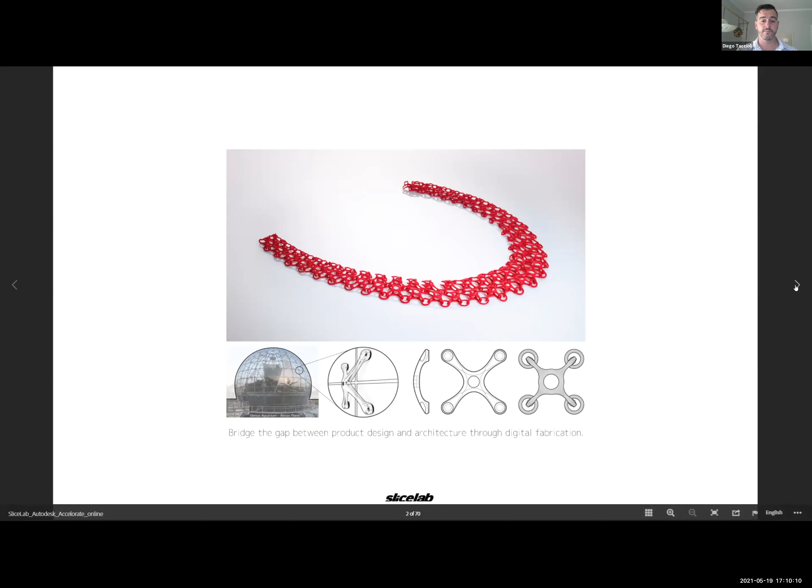So Slicelab basically bridges the gap between product design and architecture through digital fabrication, like I mentioned. While we work a lot in architecture, we have now gotten into a lot more zoomed in design, so product design, some really small pieces versus large pieces, and furniture design.

Generally, the types of fabrication we're familiar with are the three that most people understand: subtractive manufacturing, which is like a CNC mill; additive manufacturing, which is 3D printing and all 7 forms of that; and formative manufacturing, which is like injection molding and traditional styles of making products.

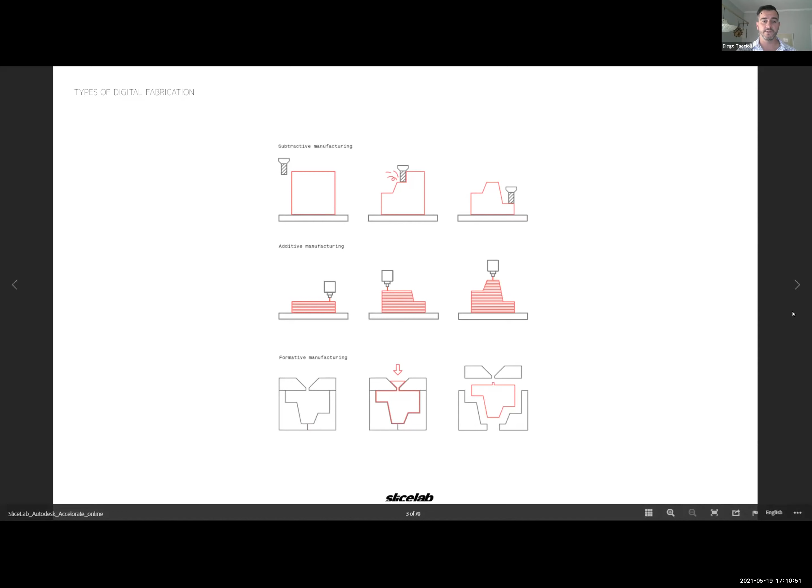So I just want to cover DfAM, which is basically design for additive manufacturing, and how generative design and topological optimization are starting to be quite a force within this realm. Generative design has been seen mostly solid for the most part, and it's starting to become pretty useful for manufacturing in all different careers and applications.

And now there's a lot more seen with lattice design and both, where generative design is something where you can do a lot of customizing, assembly consolidation, and lightweighting, while topological optimization is basically having a set geometry, like this bracket, and reducing the weight. With generative design, you can set certain parts to be fixed, and everything else basically grows from it.

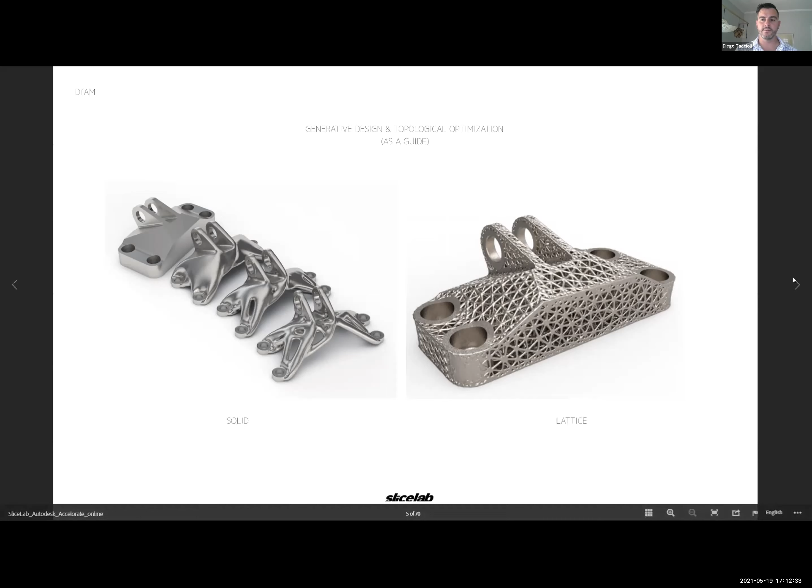The Roadrunner is a lightweight bird with a very interesting skin pattern on its feet, which allows it to be light, quick and unnoticed. So we started to develop our own voxel to understand how we can use compression and rebound. A voxel is basically a 3-dimensional pixel, or volumetric pixel. By programming our own voxel into what would be a shoe or a midsole, we map a foot imprint with a certain amount of forces that were generated through a set of colors.

So basically, you can kind of relate that. Let's say the red is the hardest point, which I can't remember the exact newtons of which we put into the software. But this goes into our parametric design, and the amount of torque, beam thickness, scale, overall height, shrinking, and rebound are basically calculated into this using this image, as well as some other factors.

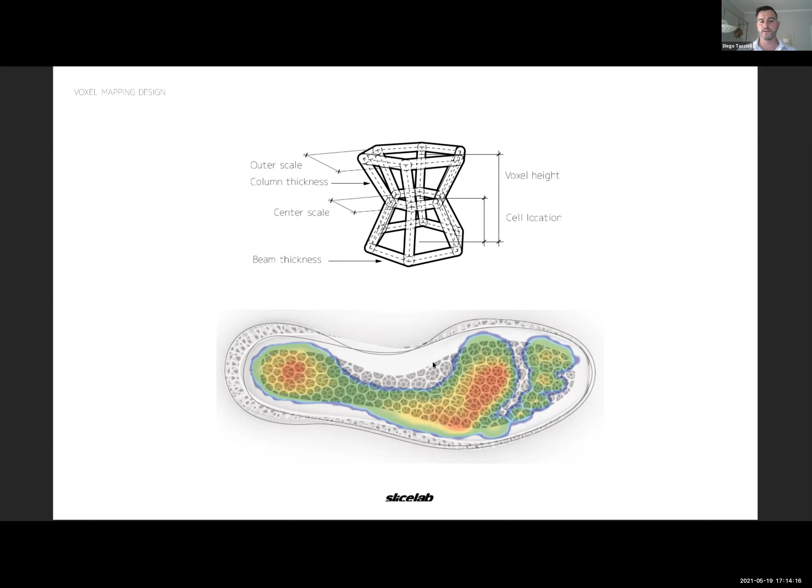And here's some final images of what we got, kind of showing the lugs on the out pattern here and kind of the midsole opening up here for the opening. So Diego, that shows the scale of those voxels, right? Yeah, exactly. So each one of these would be a voxel. Almost each one of these. It's actually like a square a little bit further past it.

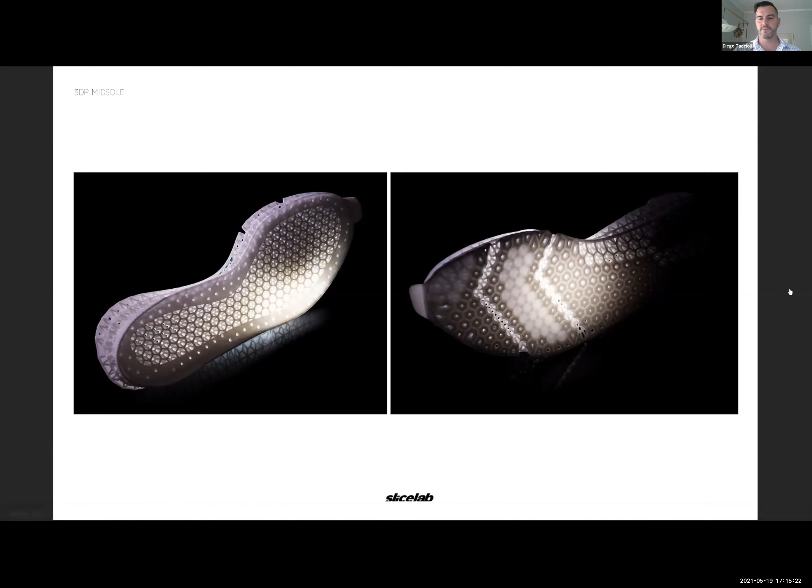And how did you come up with the name of the voxel? Is it like a volumetric pixel or something? Oh no, I didn't come up with that. It's kind of like a term used in this industry a little bit more. I just say it's a three-dimensional pixel, so people sometimes are not sure what I mean.

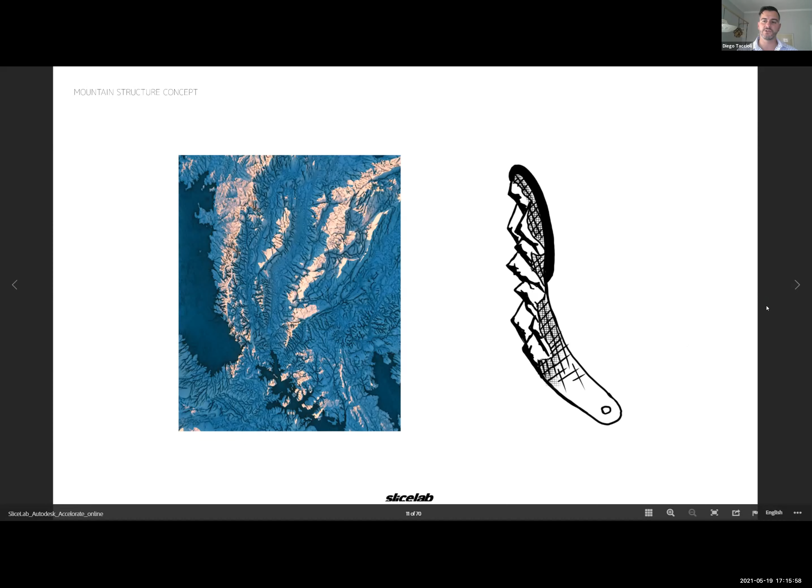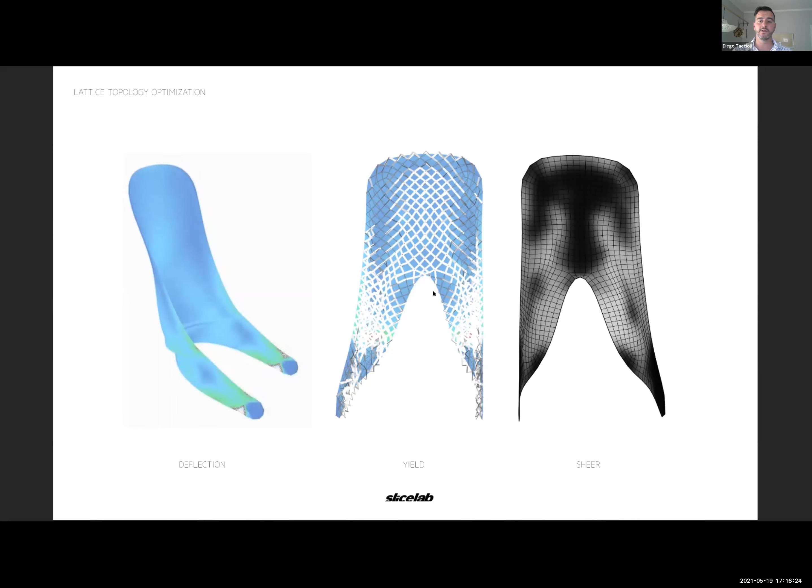And using this topology optimization for the lattice, we were able to calculate the deflection, the yield, and the shear, and basically create thicknesses where they're needed, the orientations where they're needed, and the amount of material which we can take out. So in this particular one, we figured out that we could take out this bottom part here and create this geometry, which we later 3D printed with a new high impact material that hasn't quite been released yet, but also has good thermal properties. And it's made by Loctite. And again, our partners at Origin were working with us on getting these printed.

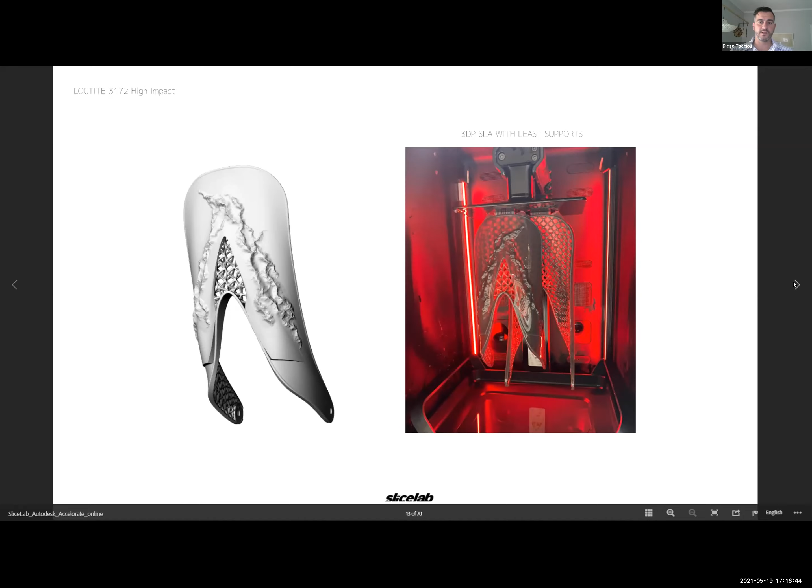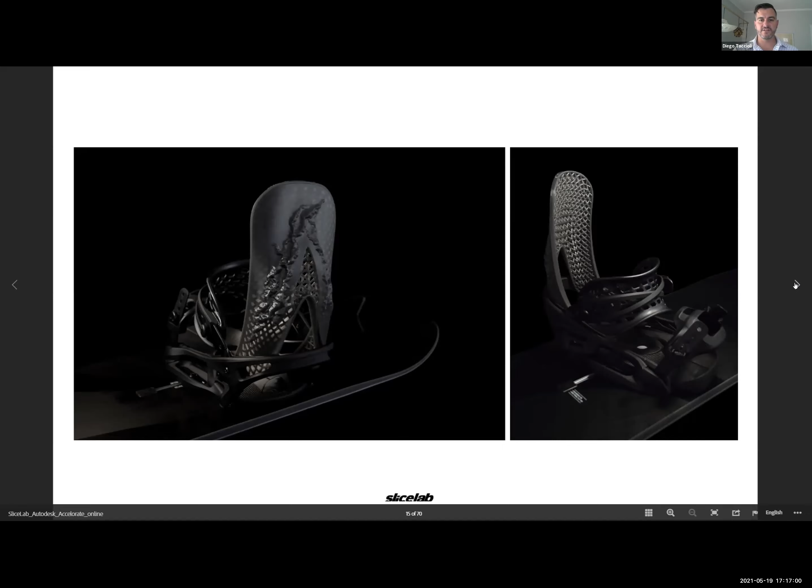And this is a real photo now. I actually went to test ride this last week, just kind of great. It seemed to hold up pretty well. So yeah, that's kind of a taste of what we were working with in terms of lattice and topology optimization. But more importantly, we're trying to get a little bit more research done on concrete complex forms.

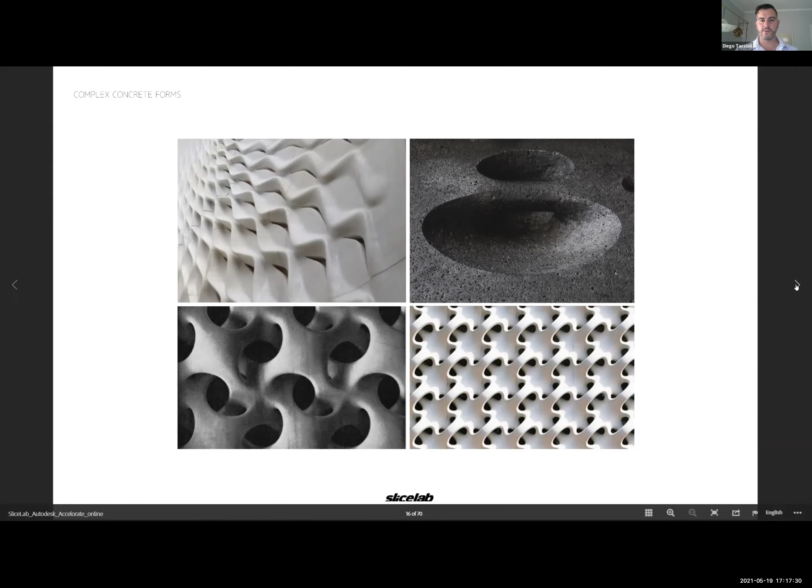So here's some precedent studies we've seen before that we were really interested by. Things like this, where there's a hole in between, or even all this stuff that's modular and then later connected. Zaha's wall texture here. This kind of stuff isn't normally seen in architecture without paying a lot of money, or even possible to do. So these days, there's just a lot more going on with it. So we took our own version of how to create some concrete forms.

Now, this is an existing developing concrete print process, which is basically a large 3D printer that extrudes concrete through a nozzle. While this is very impressive for sure, there is just so much more to be explored, because unfortunately with FDM, which is basically a type of printing process which just means that it's being extruded, you can only establish so many types of forms with concrete or clay or any type of mixture without using formwork, because it's just really heavy and gravity takes its part, and it's not solidified.

Plus, it just doesn't come out rock hard. It doesn't come out rigid. Of course, it needs to be mixed, it needs to dry, it needs to cure, etc.

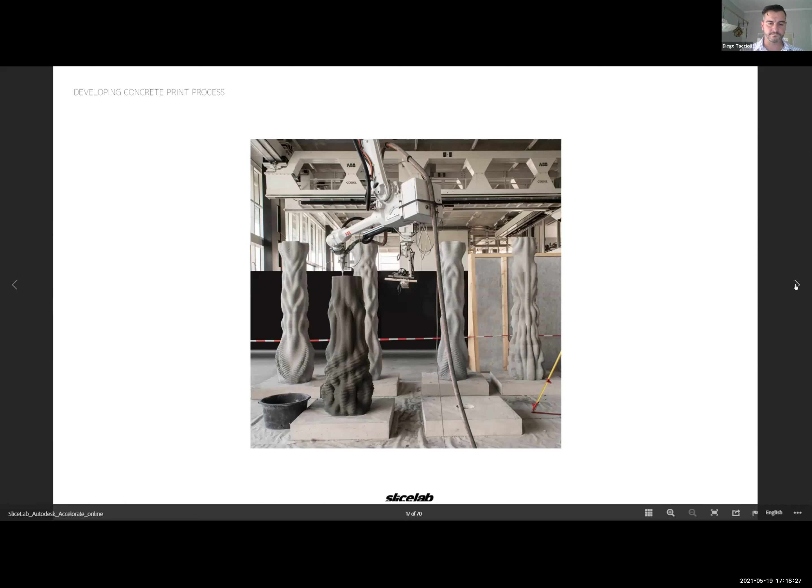So what we started with is creating a few different forms that we wanted to pour concrete into using 3D prints. So we started with a simple shape like this that was able to have 4 flat sides, which create the openings for the cavity. And then we bolted together 4 pieces of PLA, thermal enhanced PLA plastic.

Also, we added some additives like alkaline resistant fiberglass, super plasticizer to make it more flowable and to have less water to make it stronger, and then chopped basalt fibers as well. So we started playing around with the mix of all these.

And one last thing is we coated the insides of all the molds because we wanted to see what the difference of applications would be. So sandpaper, which is the most common you see with 3D printing, Z-Poxy, which is an epoxy pigment, and then there's an acetone vapor bath and a 3D print specific epoxy, which is called XTC-3D.

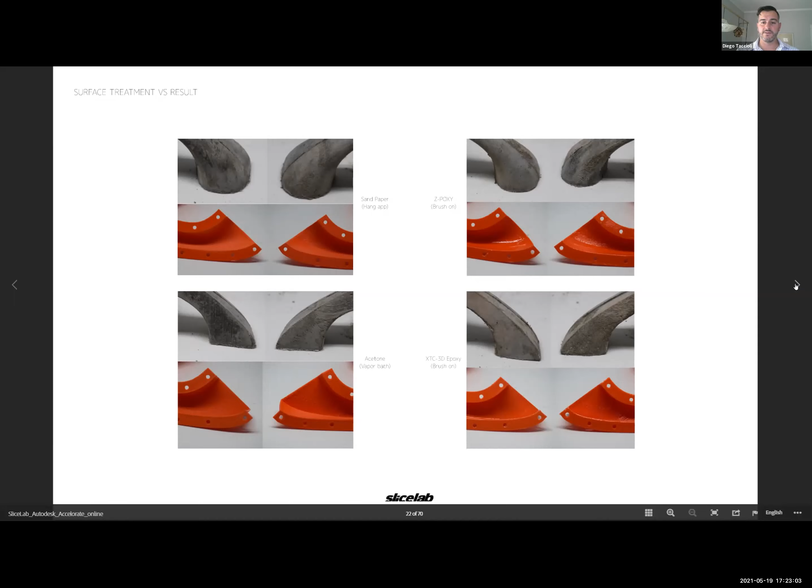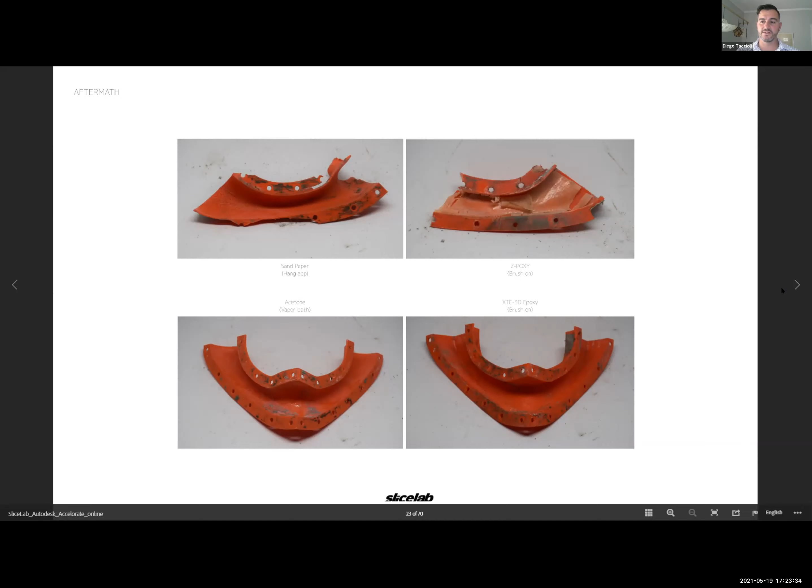And you can start to see the differences after they've been poured. So the sandpaper had the most connection to the concrete and therefore broke the most, and also seemed to suffer the most in terms of being able to stay connected. The Z-Poxy had this snakeskin-like finish after it was excavated from the print, and the last two had a pretty good rating. So we went with this piece as our next point from which to keep researching.

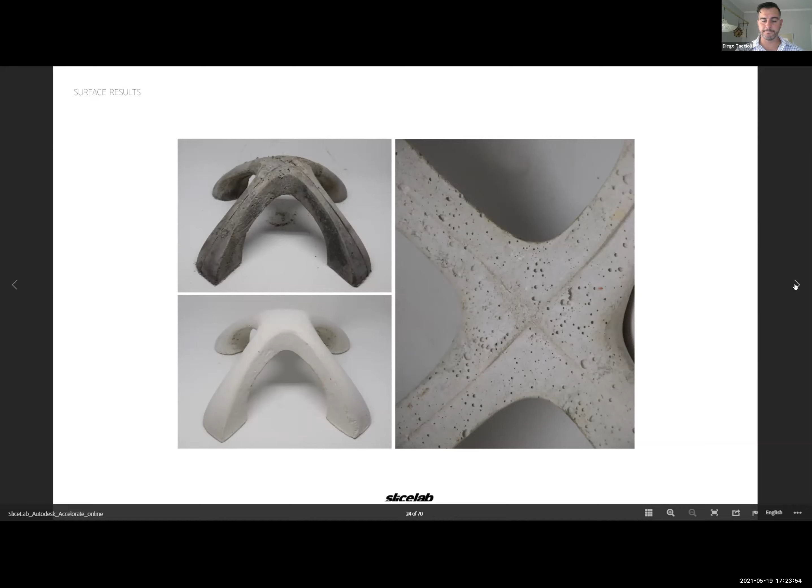And one interesting thing is we were looking at this cratering, this moon cratering that you see underneath. This is basically all the air pockets trying to get out, which weren't able to get out. So we went with this slurry, and we started to design another form. It's basically a smaller table, trying to grow up to that same size. So this thing's a lot smaller.

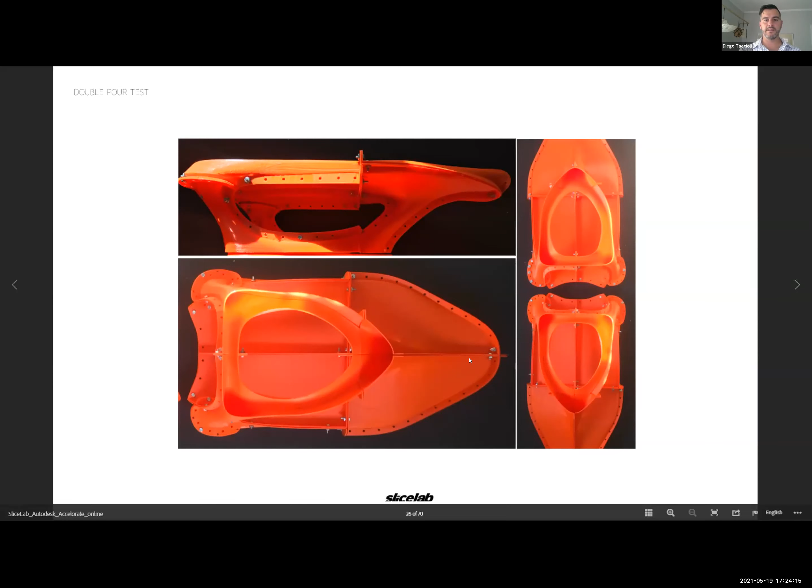It's kind of like the same size as a small ironing board. So again, we printed two sets of pieces that we were going to pour all from the top here, and they would all basically solidify underneath here, creating the top surface as a very smooth piece. And after we made an educated guess on what the two slurries should be, again, we're going with this particular one that we found to be the most valuable.

We started to see the exact amount of stress that was starting to happen on both these thin limbs and the actual 3D prints, and where they started to break because of hydrostatic pressure, because of weight, and because of off-gassing, et cetera. They really started to rupture on their own. These aren't broken by me or anything. So you can start to see the material that's coming out of it now. I just put a small iron on there to give you a reference.

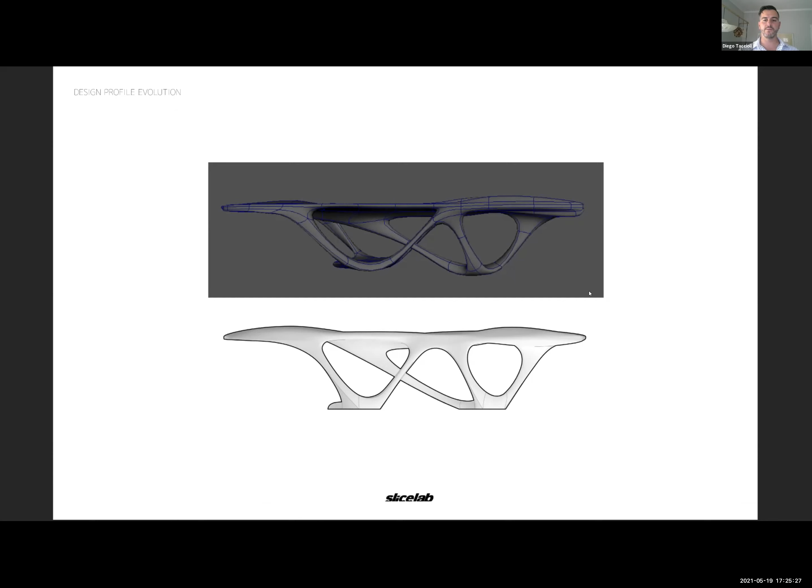So these seams started to become an issue. The texture started to become an issue, so we started to adjust accordingly. So for the final shape, we started designing through the section profile. So we want this look in terms of what the final is going to look like. We started with a Maya design that was completely sculptural and how we wanted to make it, and then we finished with something that looks a lot more like this.

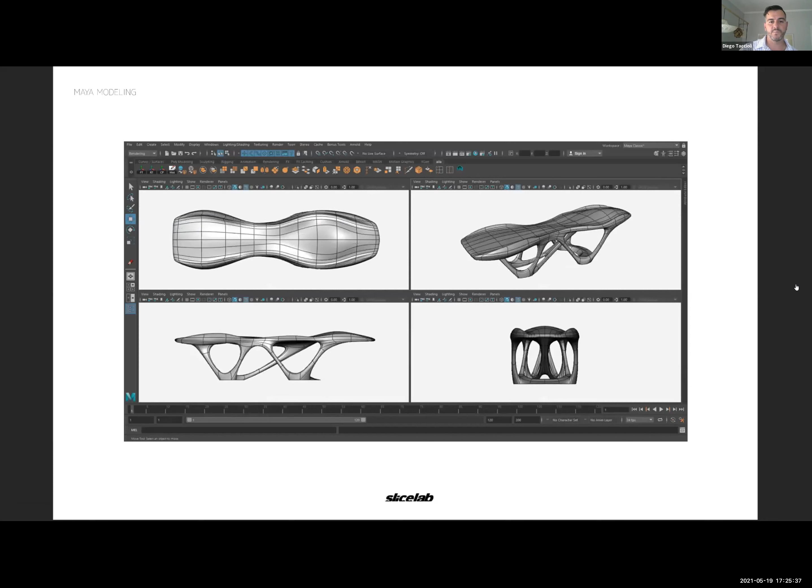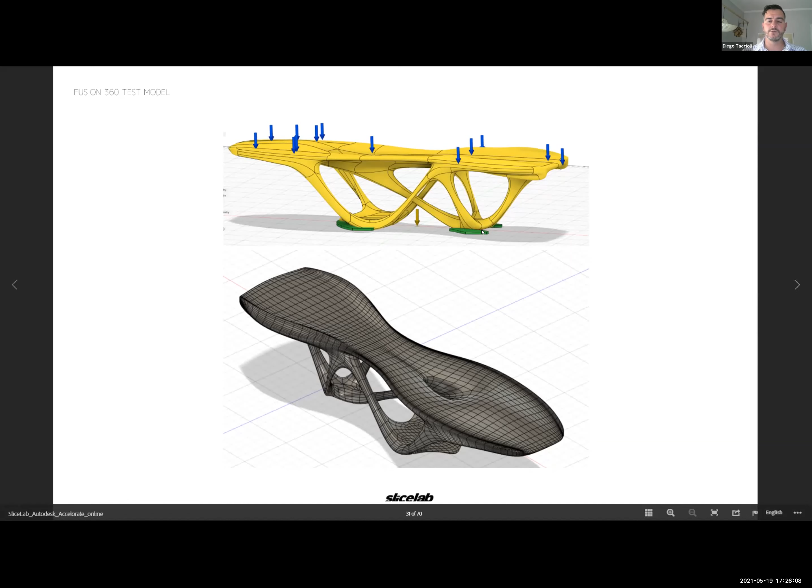And we went back and forth between Maya and Fusion using the generative process in Fusion 360. And here's just a quick time lapse of a lot of the different forms we started playing with and what we ultimately landed on. So eventually, once we were happy with the general section that you saw a second ago, we brought this into Fusion 360, and we put the adequate forces on it for the overall weight and the additional weight that we wanted to add. And we put 3 major points of connection so that our piece would basically use the generative design to ultimately land in these points versus how it is currently.

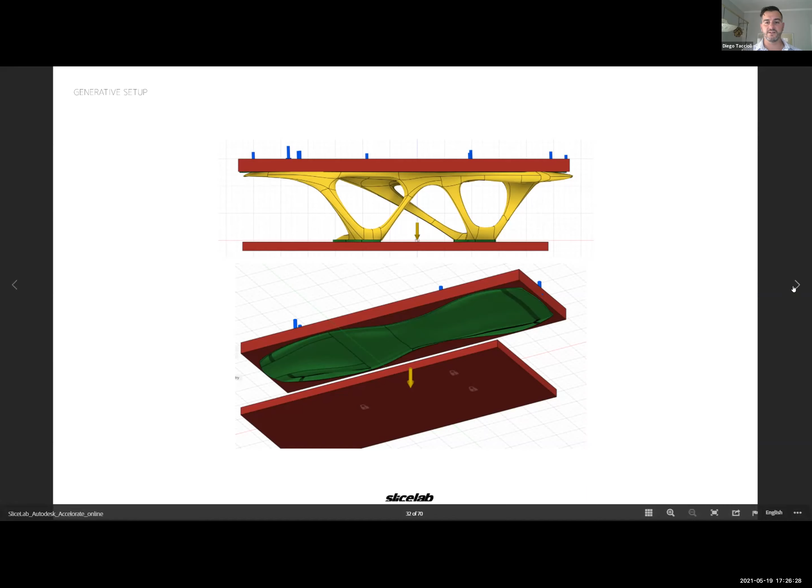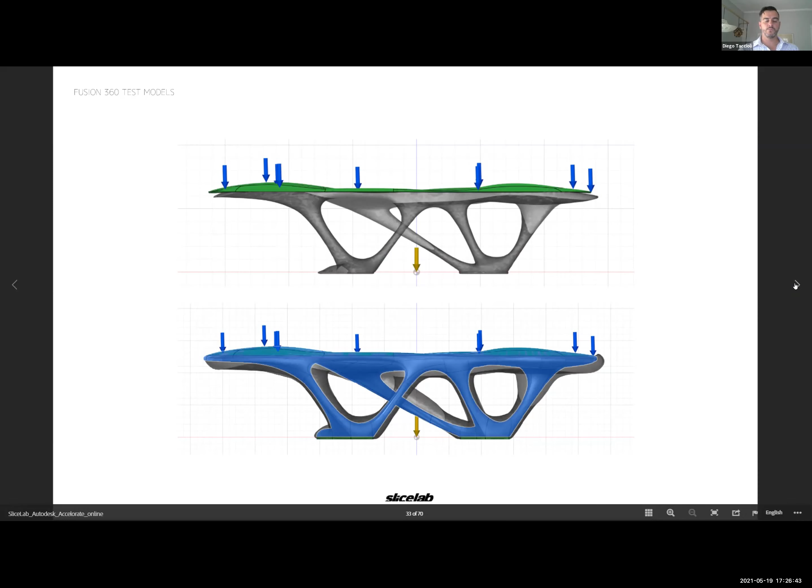And the way we set up the generative design is we designed a surface that we wanted. That's the green. The red is areas which the generative design cannot grow into. And then the yellow is the existing, or basically what we implemented. And then this shows what we got here versus what we started to implement from the previous one, and then adding a lot of the thicknesses that we had to assume at that scale, even though we had a really good feeling that we can go a lot thinner than was suggested to us.

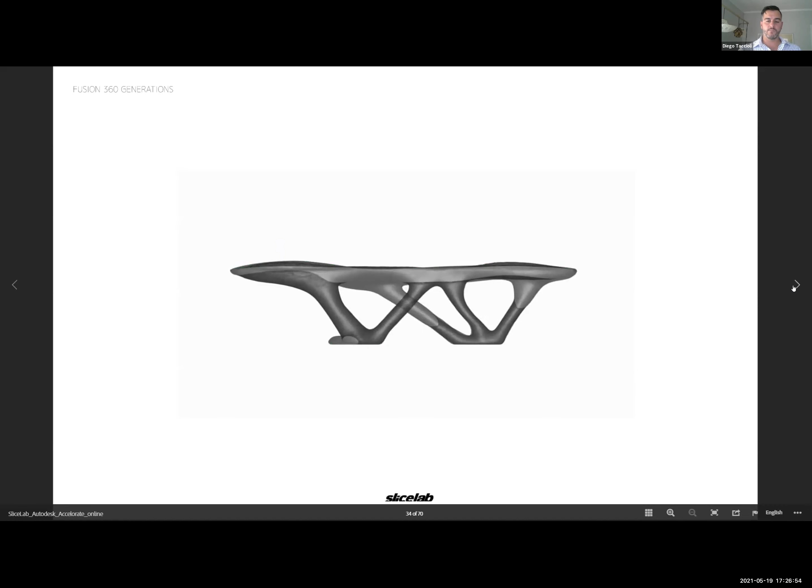So here's just a quick video of the generative design and where the forces are and how thick it started, and then how it solidifies down. Yeah, really interesting. So of course, as I look at these smaller objects, I'm questioning, how does this scale to the size of a structure? I will be getting there. It is a good question. It scales. Let me just get there because it's kind of hard to. First answer is I don't know yet, but we are looking to do that.

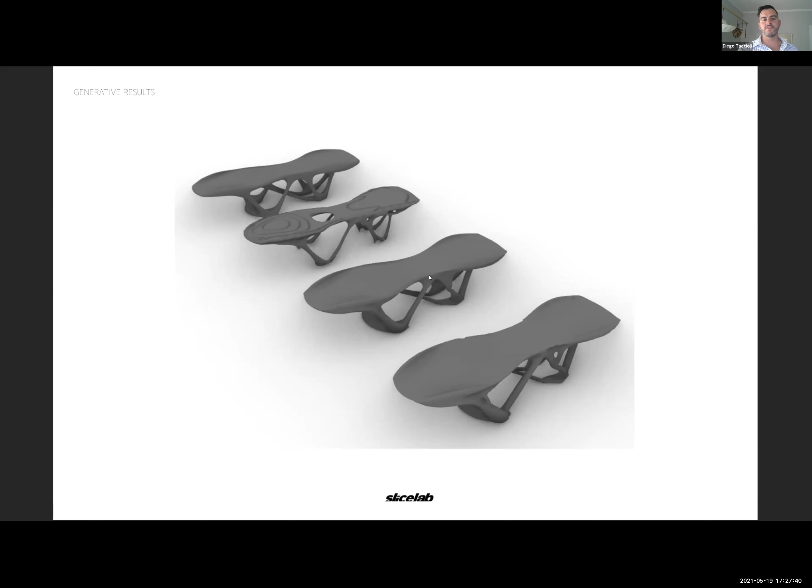So here are some of the generative results we got. This particular one here was an evolutionary solver, or basically something that was topologically optimized to reduce as much weight as possible. This we thought was a little too thin, so we ended up picking one of these and then redesigning it to create a form that we were happy with. And then we made a prototype at half scale, same exact strategy, except this one was supposed to be identical to the full scale one.

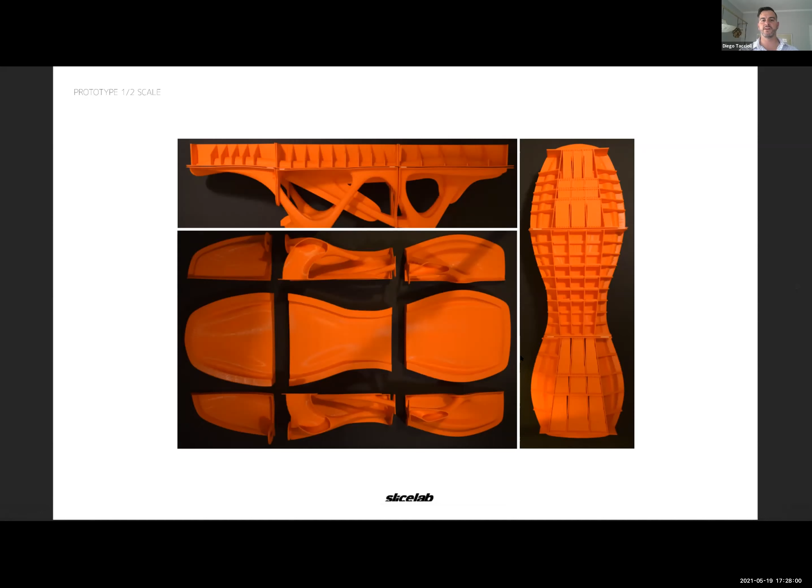So we put these ribs across the bottom so that it would sit flat when it's poured, but also to give it additional structure. We post-processed all the pieces with the exact thing we talked about before, with sanding and adding the epoxy. And then we started mixing the slurry that we designed as the best for this type of project. And we had it on a shake table. And this is what it looked like right after we poured it. And again, there's bolts all around the edges, and some additional clamps in areas that started to bust in the middle of the pour.

And we just kind of took notes from there. Like the previous one, it was not created to be demolded. So we just took a few blow torches to this to try to get it out, because we didn't really know a different way without absolutely breaking the actual piece, which is actually pretty fun, as you can see a photo of me there.

We did have some burn marks, and we lost one of the legs here. And I'm not entirely sure that's because of how thin it was necessarily. I think we kind of bumped it, but that was somewhere where we decided to bulk it up anyways in the future. These are the top and the bottom views of the molds before and after.

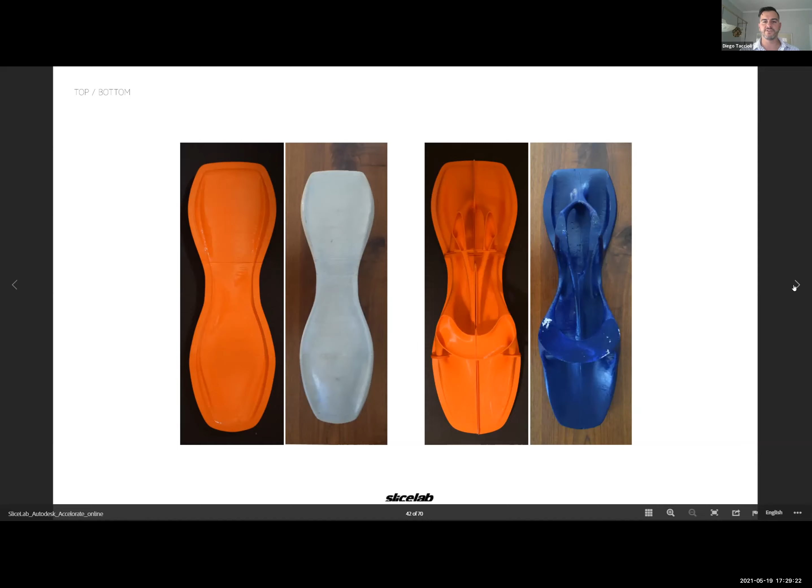We painted this blue just to kind of establish the line between the smooth and the porous, and also kind of to hide the fact that we had to glue it back on, which you can kind of see right there. And then lastly, before the final, we made a full-scale partial mock-up. So this is just like one of the legs that is part of the full scale, and we kind of analyzed the way that it flowed into the cavity with time lapse and with temperature gauge.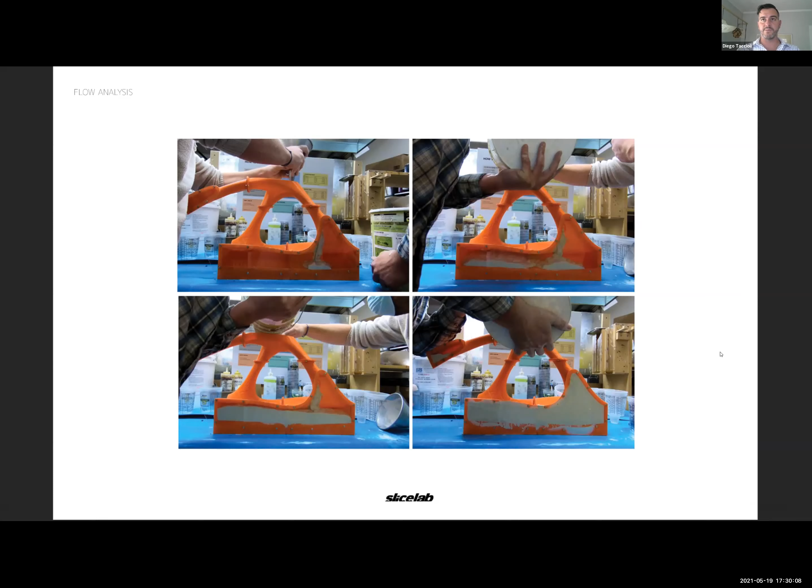We also started to implement a drilling process, because as it would off gas and heat up and the hydrostatic pressure would increase, you could feel the molds move in pressure points. So when there was a bubble that we were able to feel only after doing this a bunch of times, we were able to drill in there, alleviating that piece and allowing the concrete to kind of come out, but not enough, obviously, to leak out.

And then the glass, or the plexi, was really helpful to kind of see exactly where the flow issues happened and how they worked. Let's see here. So this is the full scale mock-up, a little bit closer. You can start to see that the bubbling here was a little bit too massive, and the texturing at that scale started to be a little bit distracting to the point where it was not ideal.

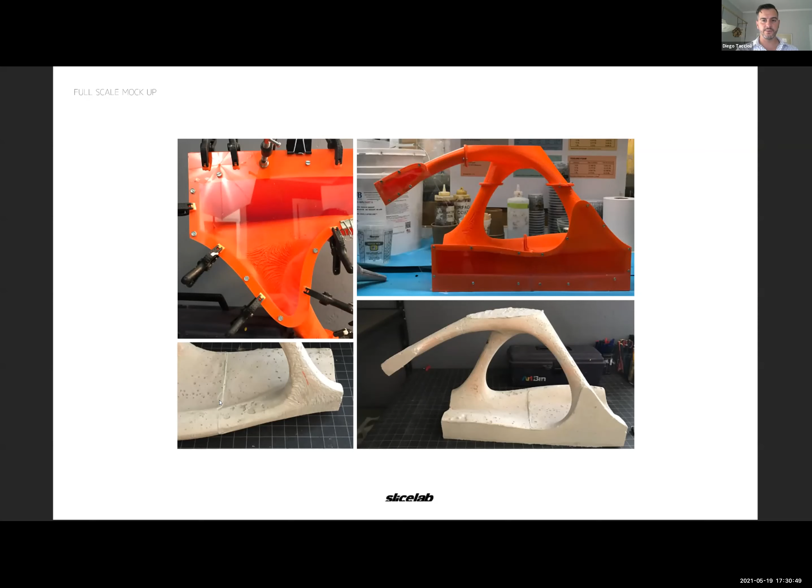Even the top piece where it was supposed to be flat was very chunky, and the separation, because of the stress, was able to really significantly move it. So again, we had to go back and reinforce the shape. So this is the final shape. We broke it apart into 23 pieces, all of which were rectilinear in form, because we did have to print it on a relatively standard printer, which was one of our main goals, not to use anything overtly fancy to create something of this complexity.

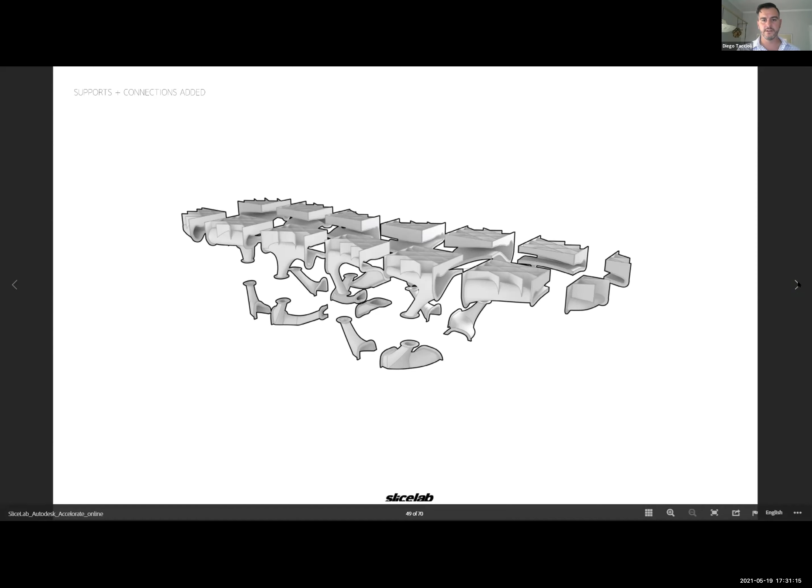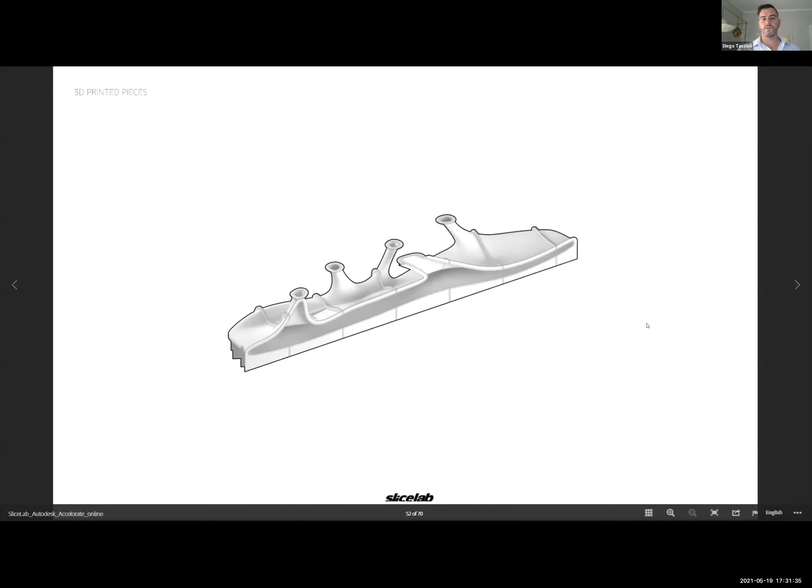And these are all the pieces in the exact orientation in which they printed, for them to have the strength that we needed in the direction that we needed, because that's also important. These are the full prints, kind of all lined up right before the assembly. This is the assembly that we made in this exact order as well, because lining up the main edge was relatively easy in comparison to lining up all the other side pieces.

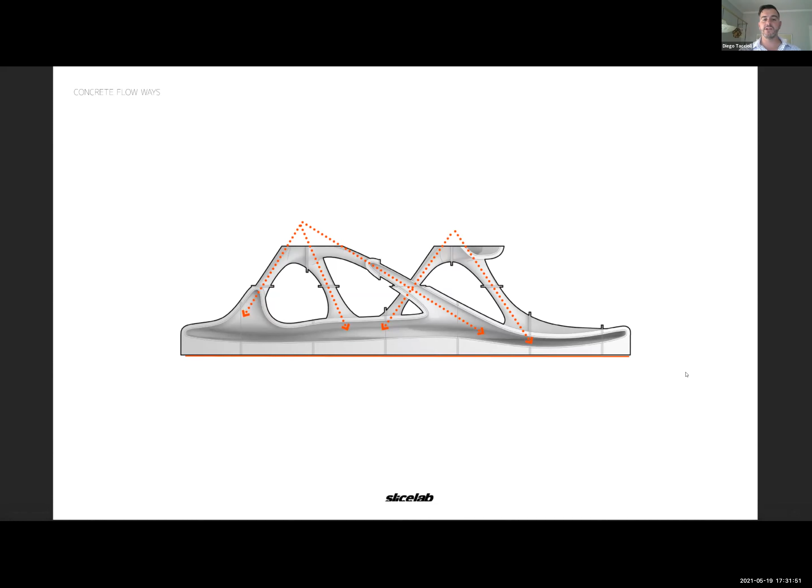And from here, we had 3 major cavities into which this was poured, 10 legs and one major final cavity. Again, we had the structure all at the base to keep it all flat, and structured these connection points even more than normal, and we even added additional microstructures within the prints, which came out somewhat well.

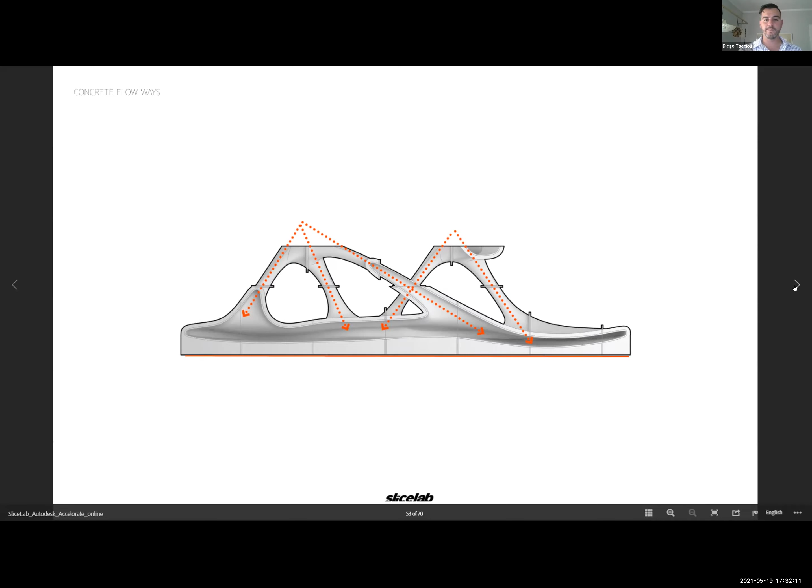I can stop here for a second if there's any questions. Otherwise, I'll keep going. I just don't want to talk the whole time. Yeah, I wanted to question you about, obviously, the complexity and the difficulty of designing something like this. So, unless it's one custom object with a very high price tag, then it's a necessity for there to be some scale at which it's produced.

Yes, exactly. So the result of this entire experiment was to figure out the amount of strength and material and geometry that is needed to create reusable molds in the future. And that's kind of our second part of this that we'll hopefully go into. For this experimental piece of furniture, it is unfortunate we had to break all this apart, but it also was a lot more economical to actually pull it off than to have what would have been at least 56 different parts that had to use specific material.

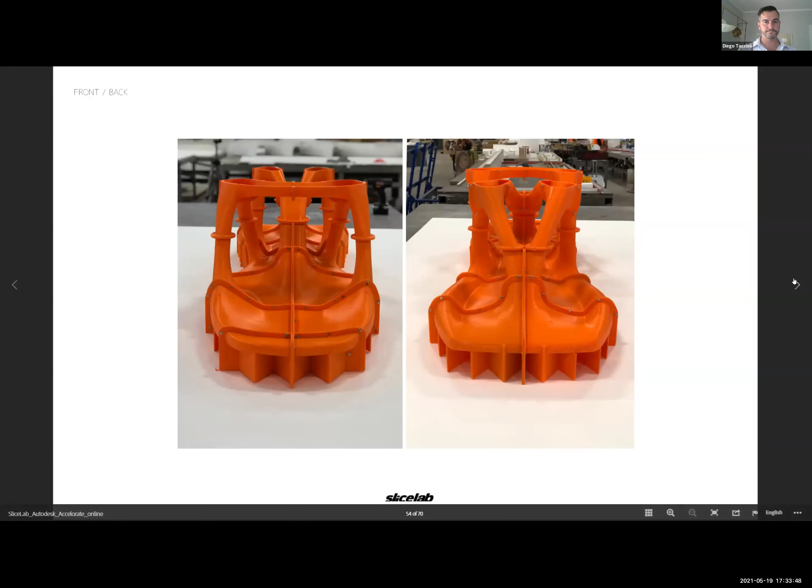So this mold, I believe, was $8,000, but it could have been $25,000 for reusable pieces. And what we're not doing right now is testing the 3D printing. We know that it's possible. We're testing the material, the finite material of concrete done in this manner, which has no rebar, to keep in mind. And I will cover both that and what we mentioned earlier in one second.

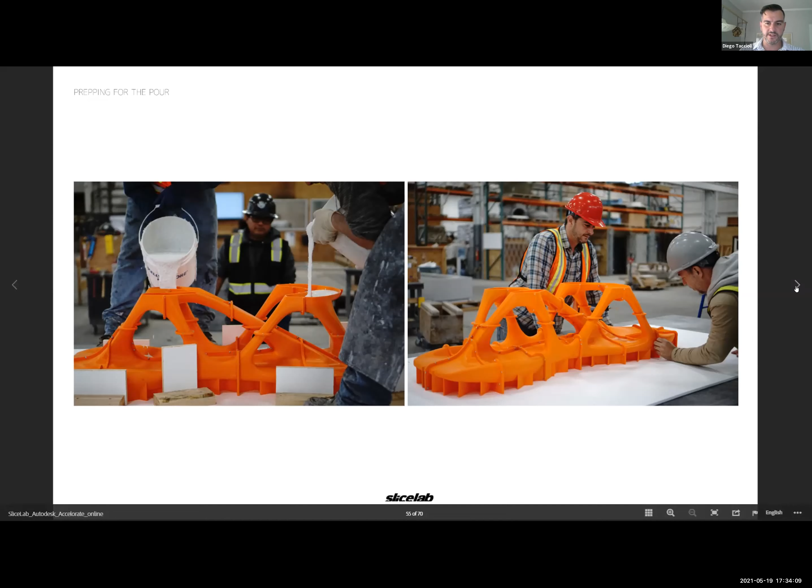So we started pouring the concrete, after which we set up all these jigs so that the concrete couldn't move. And at first, everything started to seem like it was working pretty well. In fact, this is a photo of it immediately after being poured, where everyone kind of walked away. We had a team of 9 at Concrete Works. They were our partners in the East Bay.

But within maybe 2 minutes, all that pressure I've been talking about before started basically hitting it everywhere. It was almost like a movie where all the valves start breaking. So we had all the teams either super gluing, clamping, taping, putting a rock on one piece, all the things that we were expecting came out all at one moment, and we weren't able to drill fast enough. So we basically had to drill a lot to start to alleviate this thing. And we eventually saved it.

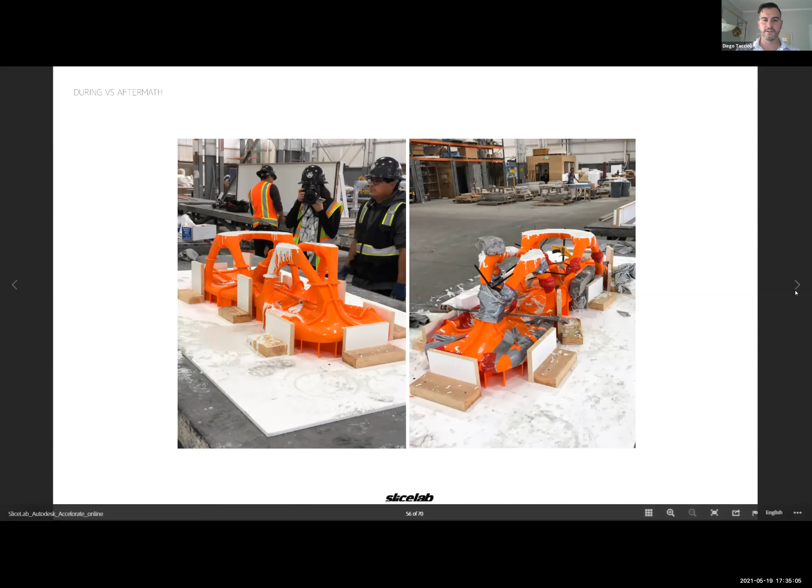It looks a lot worse than it is, but it was obviously an extremely high pressure moment that we learned a lot from. So eventually it all worked out and it was fine, and we didn't waste $8,000 on this mold for nothing. But we did have to post-process the base to make sure it was flat, like I mentioned. Some of the concrete wasn't doing that before, and then we had to excavate this thing out of its mold because they were not removable.

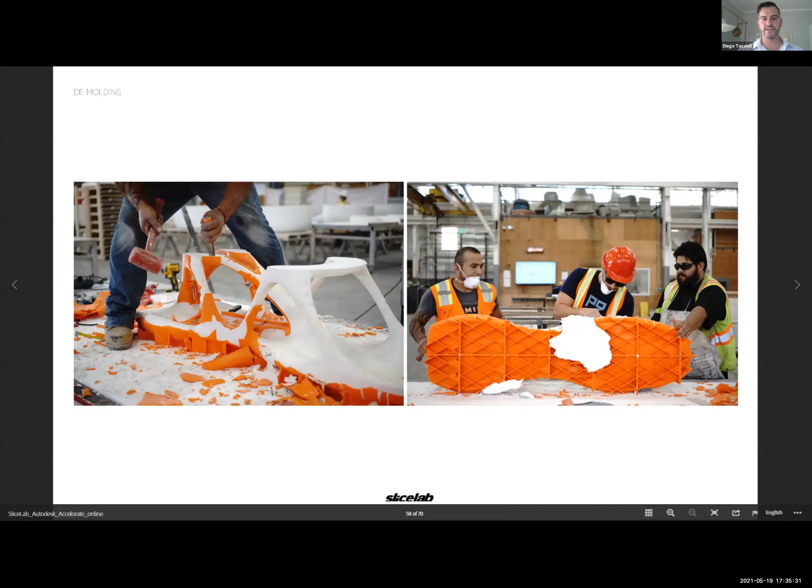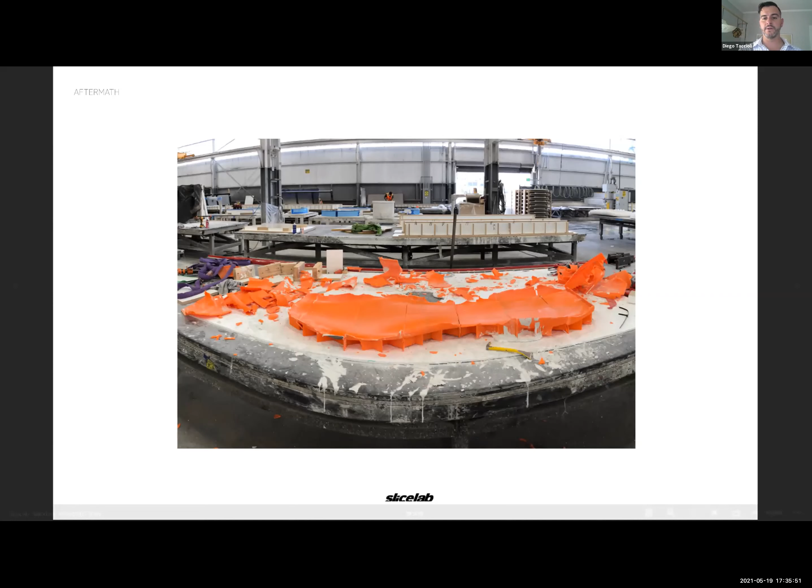So all the bottom pieces were chopped out or basically chiseled out, and then the top piece was all one piece that was very easily taken off. That was because we treated this piece the most because we wanted it to be the smoothest. And that's also most importantly where all the bubbles did not stay, because they're trying to rise up through the legs and out, or through the holes that we provided for them as we were pouring.

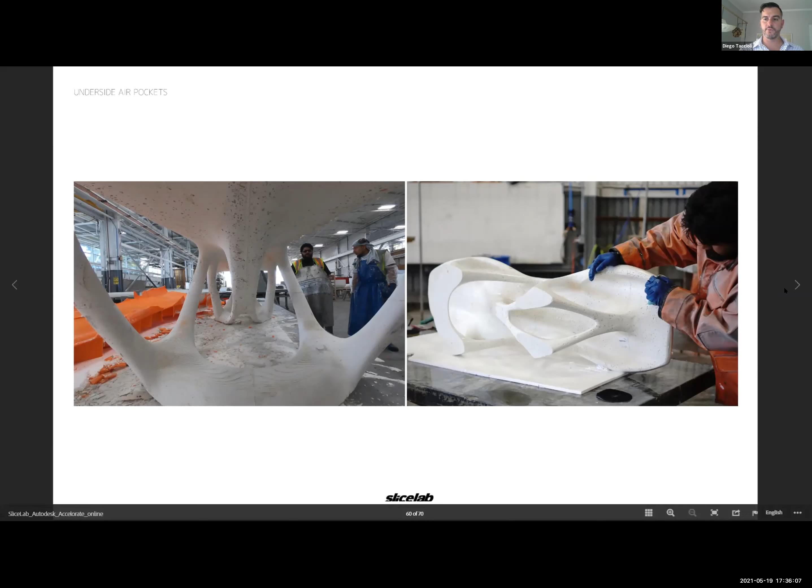So the table actually came out relatively well. You can start to see the striations at the bottom here of the 3D prints, and then the air bubbles here. And then this is the table on its side right before we hit it with the wet diamond sander.

So it went from being relatively striated from the 3D prints, which you may or may not know have when you print them with FFF extrusion, to pretty much a mirror finish afterwards, which was obviously pretty nice. And you can see after it's dried off that matte, really nice concrete there, while you see the juxtaposition with that porous moon-like surface there. Here it is, just waiting on the table.

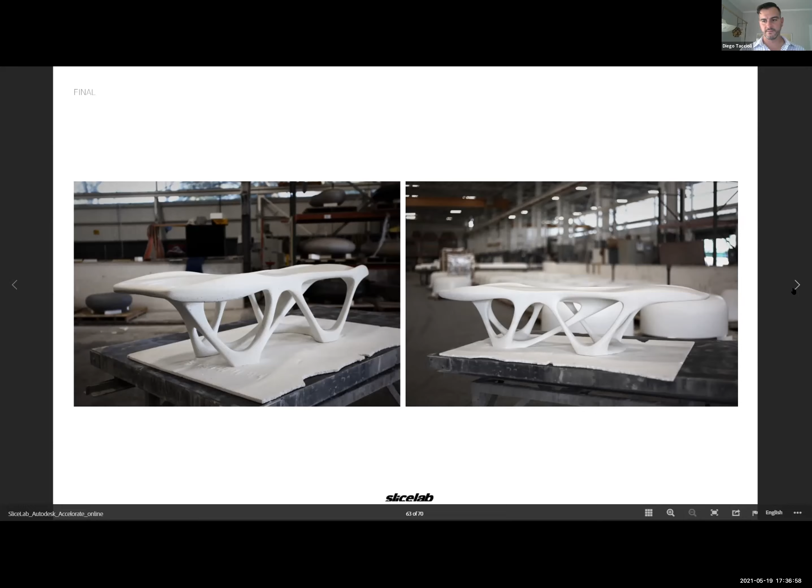One other thing I forgot to mention is this was on a giant vibration table, so all of that vibration with over 250 pounds of wet concrete was very stressful for these 3D prints. But it did eventually work out, and we got it finalized. This is the final piece. Are there any questions on that before I get into what we're thinking about for scale, as you mentioned before, which I think was a great question?

Yeah, of course, I have another question. This question has to do with this partner, Concrete Works, and the obvious fact that you're doing both design and construction together. So is there still a separation of disciplines there? And is that where Concrete Works comes in?

So when I say partner, we partnered with them on this particular project as a collab. They are experts in this field, and while I did a lot of research with my business partner and whoever I could talk to, whoever I could look at, given the experience level for something so challenging to work with, we felt a lot more comfortable partnering with them. At the end of the day, even if I know how to hammer wood into a wall, I'm not going to build a house because I haven't done it for a long time.

And I agree that it's starting to become a bit more blurred when you can create objects that are CNC milled directly and used in the field. But at the end of the day, I think the two disciplines are for sure still separated. Though I hope in the future it's not going to be as black and white.

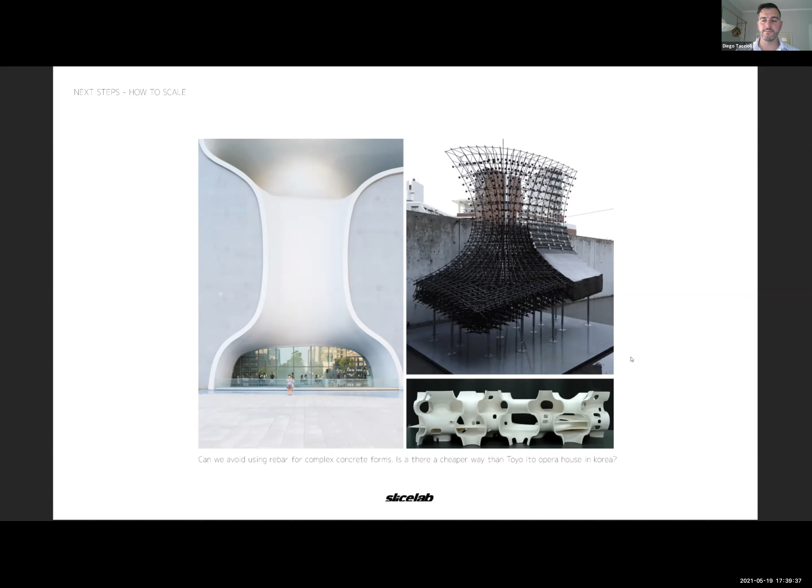So this is all the rebar that they had to figure out how to do, all done in metal and mostly by hand. And then obviously the final looks incredible, but this amount of structure I think can be alleviated both in weight, speed, and optimization.

Now, one thing that we were going to do, but we didn't because after speaking with Concrete Works we realized that there was no need for rebar at this scale, is we started to look at different voxels, like I mentioned before, which were really good for pouring concrete with either diagonal valleys and tunnels or direct filtering valleys like this octagon here. And we started experimenting with imagining this was like a column instead of an actual table.

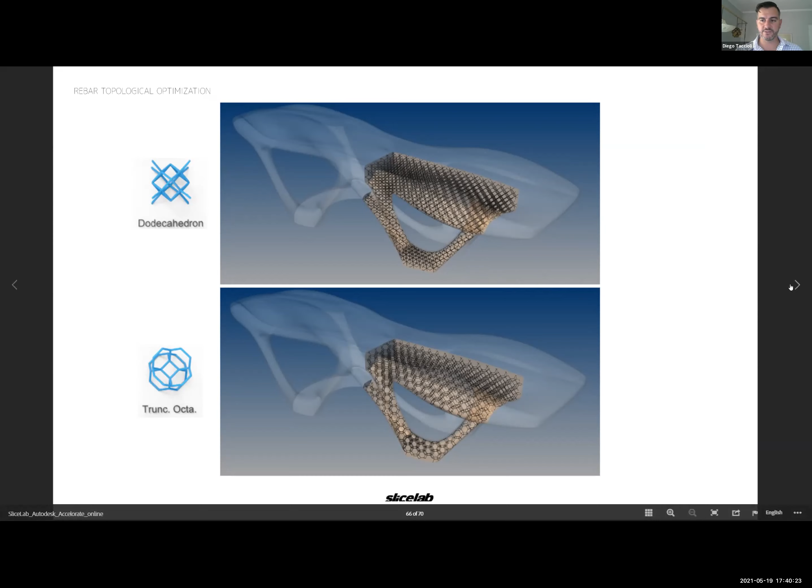And this was filled in the entire structure of whatever it is that you were making. Imagine if this is instead of a table, it's like a pavilion with a roof. So that's what we want to experiment with next, with creating concrete lattices, even though these are metal. Imagine this could be made in concrete, or it doesn't have to be a solid form like it is,

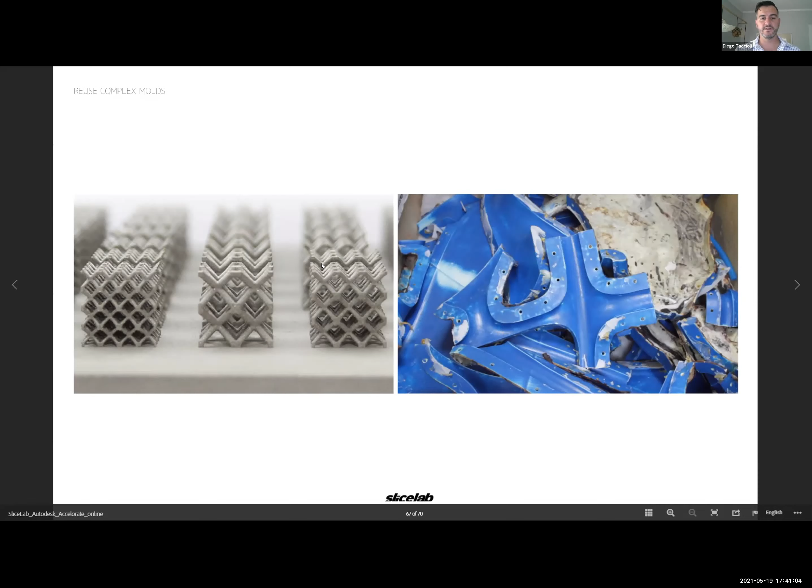or having molds like this. This is a Joris Laarman project with removable molds that are 3D printed, versus these that are injection molded. So while these molds are incredible, each piece costs a lot of time to make, and the material is really expensive. So I think if we have the right material that could be 3D printed, we could create wild looking lattice structures like this out of concrete, or it could just be the internal section of what it has.

The company we've been talking to a while ago is Branch Technology, and they basically create a carbon fiber infused filament that comes out of their proprietary KUKA robot that they paint green, and they can create three-dimensional lattices, kind of like space frames, directly out of the printer. And these, because they're carbon infused, not only are they super light, but they act almost identical to rebar.

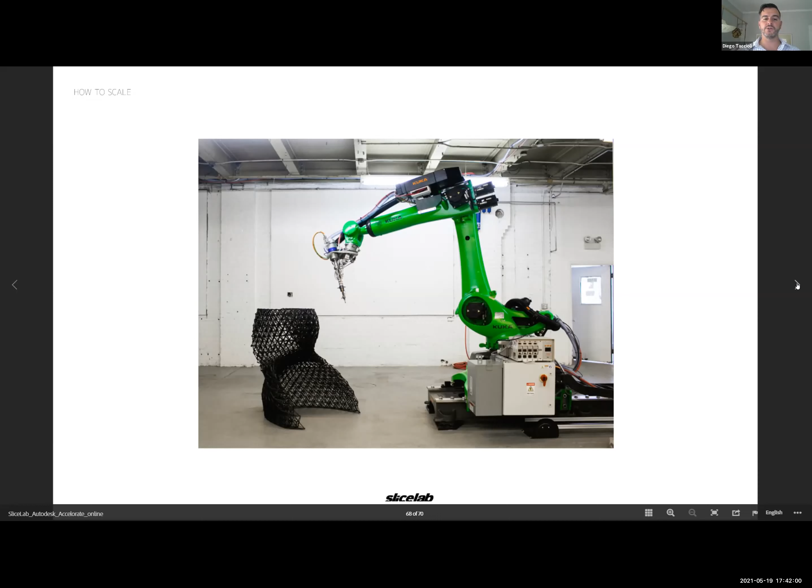So we imagine that we could work potentially with a company like this to create an internal lattice system that acts as rebar, not just a regular lattice system, but a topology optimized lattice system, to have the least amount that you need to create the structure or the concrete in the least weight possible, and have good flowability, so that you could basically create rebar and removable molds to make larger projects.

This is a design project we did for the competition that they held. We unfortunately got second place, and the first place house is getting built right now. But had we been able to win, something like this could be realistically molded and recreated as a custom house, or something that is not a one-off or a throwaway, but basically something that would be nearly impossible to make otherwise. But we think we can kind of do it with the strategy we're doing, with obvious constraints.

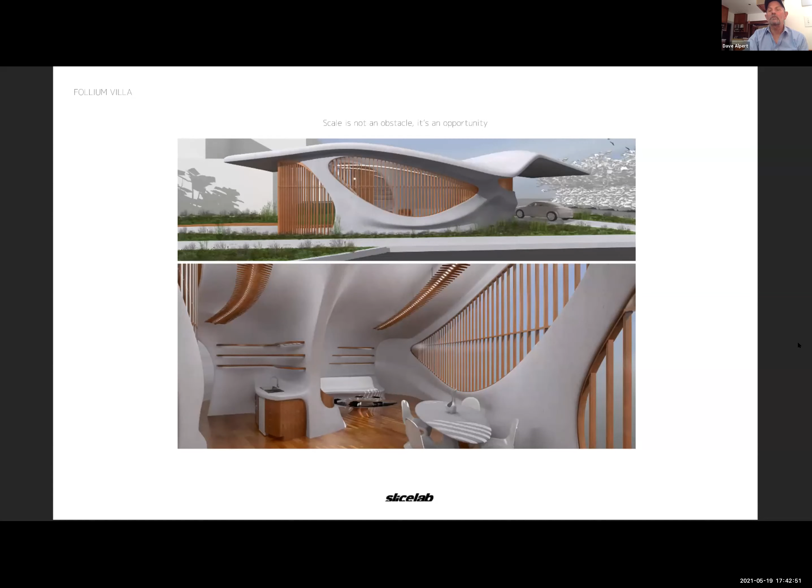Okay. Well, Diego, now that you've taken the small object to the scale of a big structure, which is awesome, I see that our co-presenter, Jeffery, is able to join us. So it's great. I'm finished. So that's good. Great. Yeah, that's perfect. Okay. Perfect.

So I'd like to introduce Jeffery. Jeffery is the CFO of Model No., and he has been working for 20 years in solving these types of fabrication challenges, the digital fabrication challenges. And we were just talking about designing and building. So part of Jeffery's focus is integrating those two. He's integrated them into another company called Because We Can. Such a cool name. So I'd like to welcome Jeffery to share a little bit about his work with Model No.

Thank you, Jeffery. Yeah, I'm actually the CTO, not CFO, but that's okay. Oh, I see. Sorry, your bio said CFO. Really?

No, it's the fault of your bio, man. Okay. Sorry to be late to this. I got the link 10 minutes before it started, so I wasn't sure if it was even happening, so I do apologize for coming in late. Let me share my screen, and I can talk about a couple different things. Hold on, let me just get my screen sharing, 1 second, sorry. There we go. Let me know when you can see my screen.

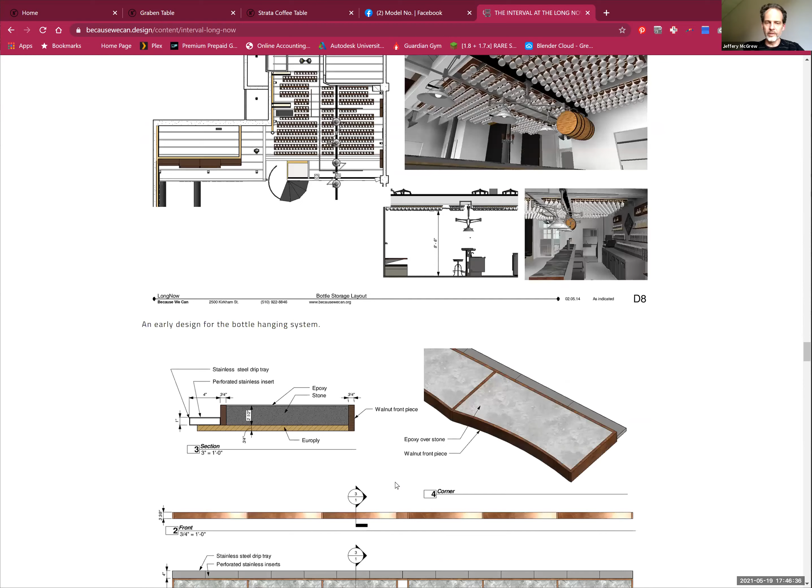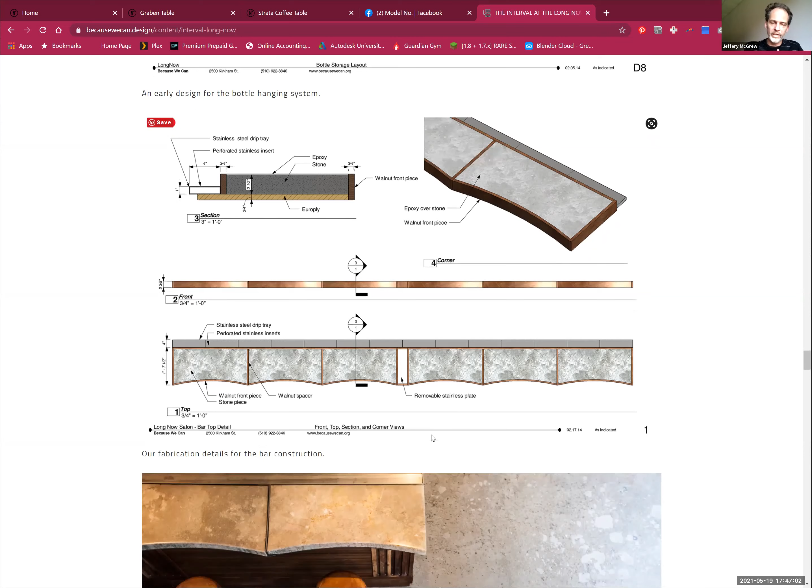The only really unique thing is how we were kind of living in the future to some extent, where people talk about using BIM or digital models for design, and how you could eventually use those models directly for fabrication, much like Diego was just showing. That's happening, and it's been happening for a while in more prosaic areas. HVAC and structural steel have been doing this for quite a while now, and now it's starting to get into more creative areas. So we did a whole lot of projects and can talk about digital fabrication in this regard.

This was our small design build architecture firm, and then we started a new company that's a product company. This is more of a traditional startup, where we have investors and raised money, and we're trying to become basically the next Herman Miller, which I know is incredibly pretentious to say, but if you're gonna start a product company, you should try to start a product company, right? We're not trying to be another boutique, expensive designer label making $10,000 chaise lounges or something like that.

We're trying to be one of the most sustainable furniture companies around. And part of that is the same thing. Herman Miller was actually a pretty traditional furniture company back in the 30s and 40s.

And it was after the war and them adopting new aesthetics with modern design, but also new materials like bent plywood and fiberglass and new ways of making things, and finding new product niches that let them grow into what they are today. So we're taking a similar tack in some regards.

So the three key parts of Model No. are, one of them is on-demand digital fabrication. So we have a prototype set up now of this micro factory concept, where in a small footprint a small team of people can produce a really wide range of products from a handful of very automated digital fabrication tools. So with a combination of CNC and additive 3D printing, we're able to produce whole product lines out of a very small footprint with no held inventory and very little product risk.

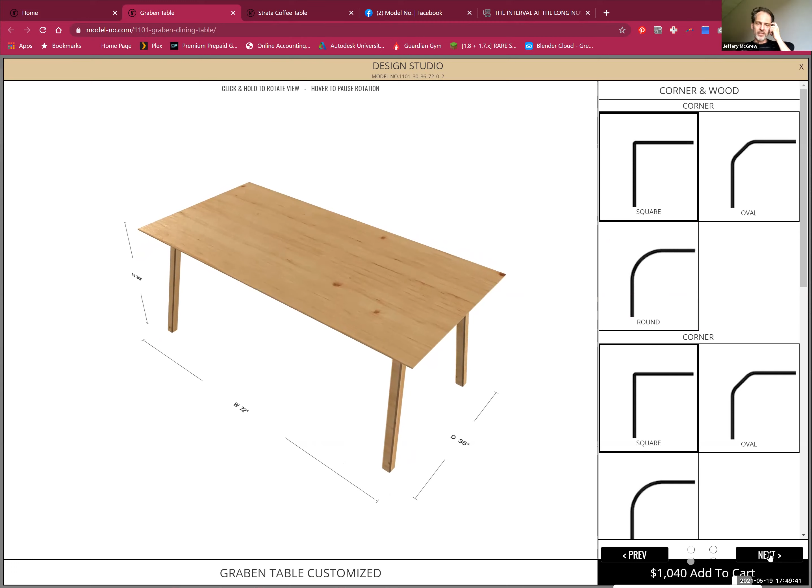The other thing too is that because of the digital fabrication that we have going, all of this stuff is customizable. So we have a little design studio here where you can go in and edit different aspects of the table, change the corners and stuff.

It's being funky, of course, because whenever you present on Zoom, that's when things break. Yeah. So give me a second.

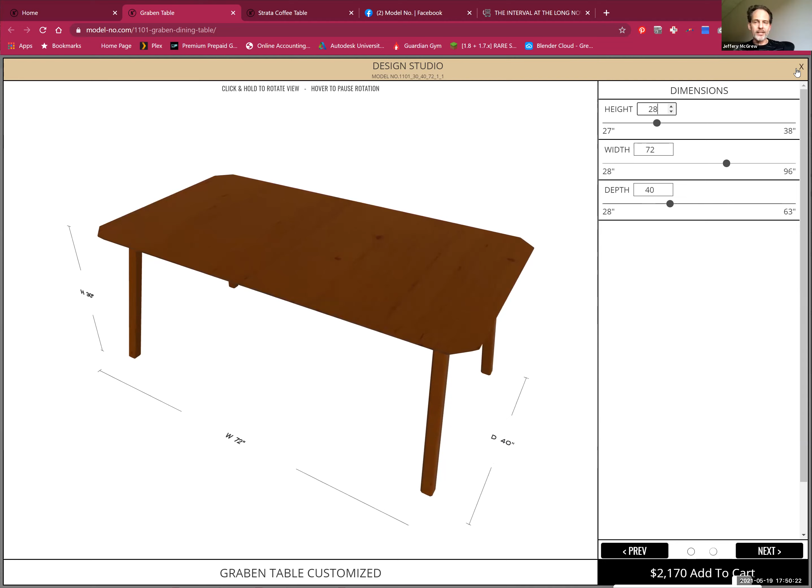But there it goes. So I can change corners, I can change materials. I can then change dimensions as well. So I can customize to the inch widths and heights and depths. But because it's all being digitally fabricated on demand with an automated system that we have on the back end to manage all the data and the ordering, you can get this table in like 2 or 3 weeks from order, even though it's totally custom. And so we have a bunch of products that fill that same idea, where it's highly customizable, highly sustainable, modern design.

The price points we're aiming for, again, like I said, Herman Miller. So it's not IKEA price points, but the price points are reasonable for what some of the things are. And we're working like crazy and coming out with new product about every 2 or 3 weeks. Because we have no held inventory. A traditional furniture company has to guess what people are going to buy, guess how much they're going to buy, go make a whole lot of it, and then hope that they actually sell it and hold it in warehouses. We don't have any of those issues. We're able to just test market stuff like crazy, try different things like crazy.

So right now we actually have a whole bunch of outdoor stuff coming out. This is some of the first outdoor stuff that we've had with this outdoor line, outdoor dining table and chairs, tables and other things. And we have a bunch more outdoor stuff that's just about to come out. So some of these things, like this chair, for example, it's a wooden base with a 3D printed seat. And right now we're having this be pretty basic because we don't want to confuse consumers too much, and we're still figuring out the best way to offer this as an option.

But behind the scenes, with our CAD model and everything, we can make that seat ergonomically fit you perfectly if you just tell us 1 or 2 things about your body, right? Because the seat pan part is getting 3D printed, it's getting made on demand. It can be customized just as much as anything else. And when we first started out, we were actually offering things with a lot of custom options, and it was really overwhelming for most consumers. So we actually pulled back how much flexibility we're offering. And so there's a lot of space here that we're exploring in terms of what kind of conversation we have with the customers.